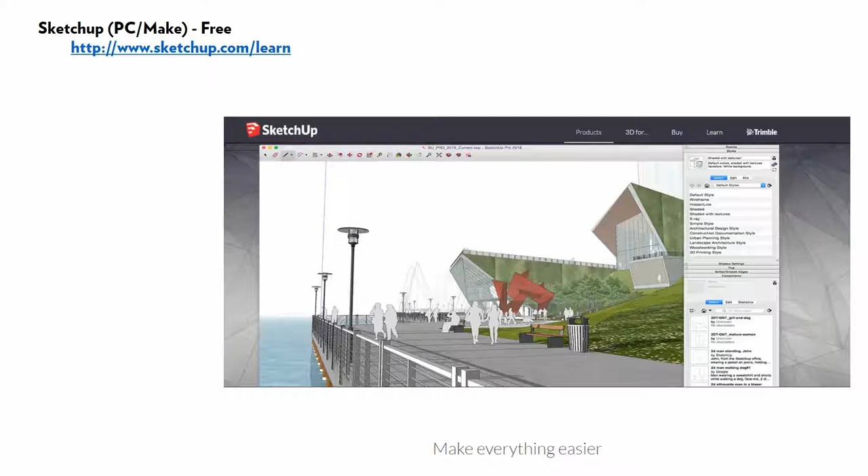SketchUp is a free program for large-scale stuff. You can do a whole host of 3D design, but it's really meant for architectural work. In fact, our entire workshop can be rendered in SketchUp—here's our building.

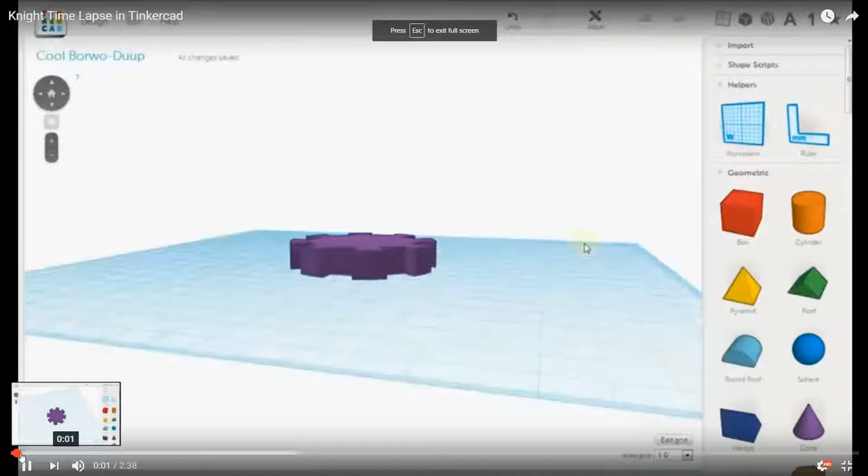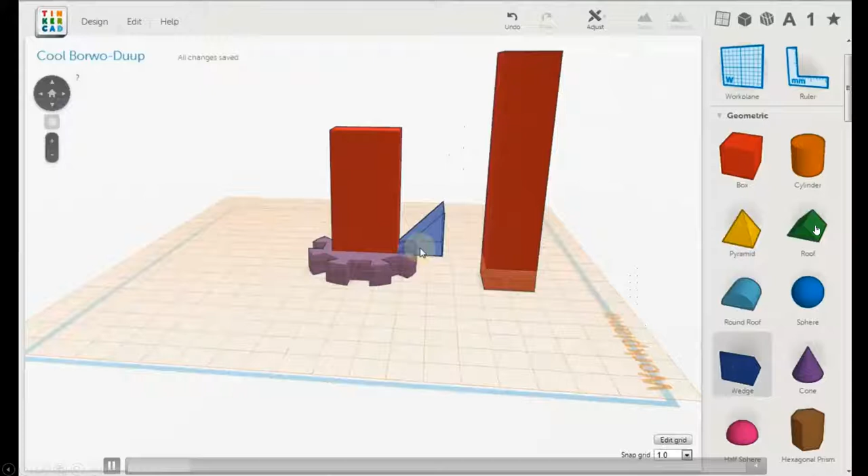Here we're going to step through an application of using Tinkercad, where I was very impressed with someone who took Tinkercad to create essentially a chess piece out of things that look like tools. So here you just add blocks. You don't even have to design these blocks. You just drag them over from the menu, whether it's a box or a cylinder or what they call a little roof, and you can create shapes out of these things, or you can use these to create shapes that you subtract out of these bigger pieces.

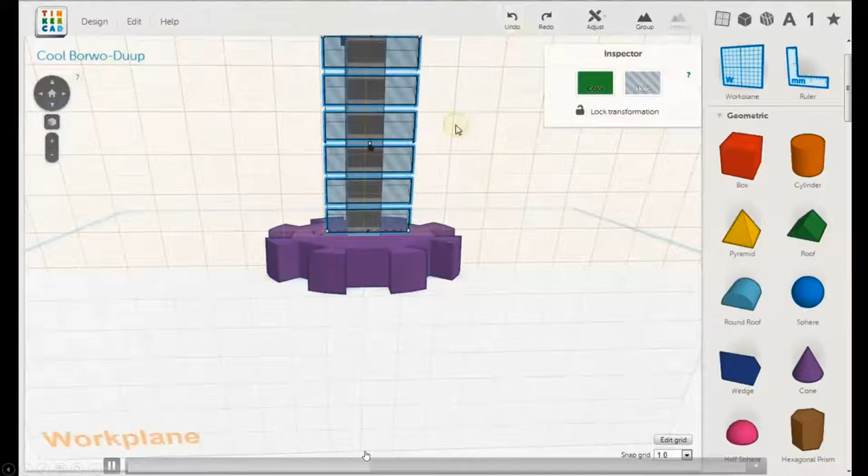So here we're seeing someone make a chess piece that looks like a handsaw, and shortly you'll see them copy that roof shape, duplicate it, group it together, and then subtract it from that metal-looking centerpiece there. I'm going to skip ahead so you can see that happening. So here they took a lot of those triangular prisms and grouped them together.

If you can group objects in Microsoft Word for making a figure, you can do CAD. It's really intuitive, really fun. And then, of course, you can save this file and you can 3D print it, or you can slice it for laser cutting and machining.

Another thing I really like about Tinkercad is Thingiverse. Thingiverse is a free repository of legally downloadable 3D design files. So you don't need to create things from whole cloth. You can download, for example, a phone case, and then Google, say, the word falcon.

I learned that if you Google for images, there's actually an option to choose what type of image, and you can select to just show line art or line drawing. Equally, you could just search falcon space vector or falcon space SVG, which is a popular vector type of extension. But this will limit the results to these line art images. And then pick the one you want. This fellow picked a superhero named Falcon.

Then use an image conversion software that's, again, legally free through the web, where he uploaded a JPEG and it gives you an output of a vector. Later in these videos we'll talk about what vectors are. You can import that vector into Tinkercad, and the nice thing about Tinkercad is it automatically can add some depth to an otherwise two-dimensional vector. So here it's automatically added 10 millimeters to the thickness of that vector art.

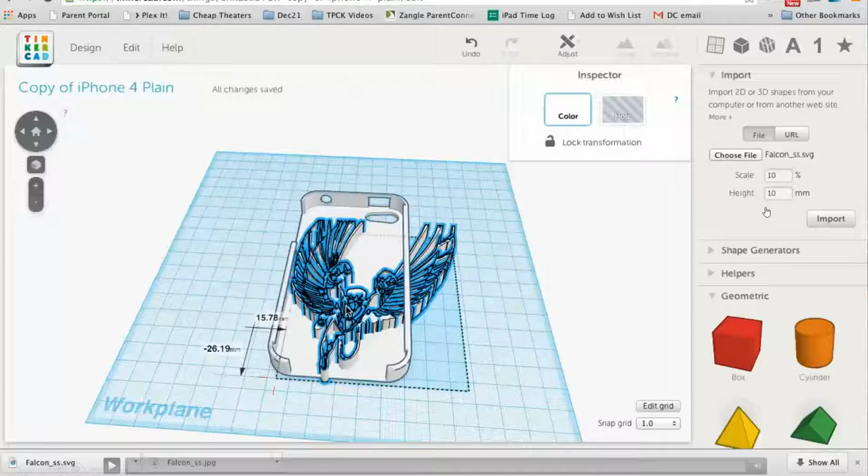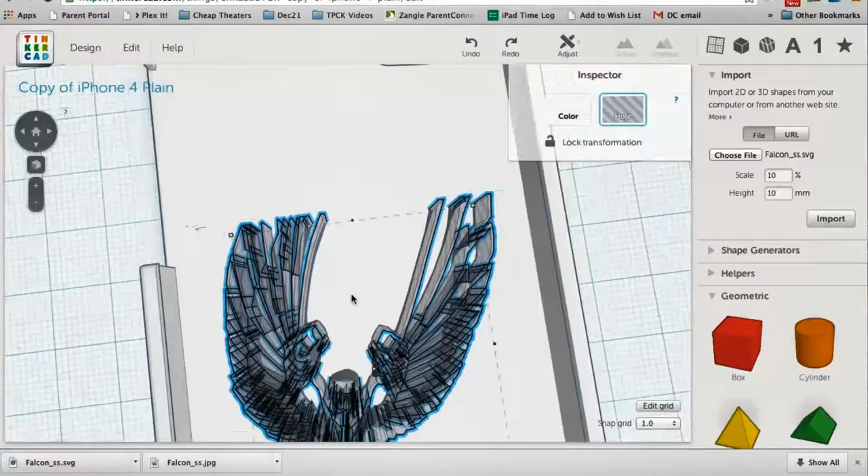This person took that image, scaled it down, and then used it to effectively emboss or subtract out of, or add to, that iPhone case. So you can see that very quickly you can download a legally free 3D model of a phone case. You didn't need to create that yourself. You can search for an interesting free image, turn that into a vector, turn that into a 3D object, and either subtract it from the thickness of the phone or add to it. Very rapidly you can customize and add value to digital prototypes. And then, of course, you can 3D print this or machine it or what have you.

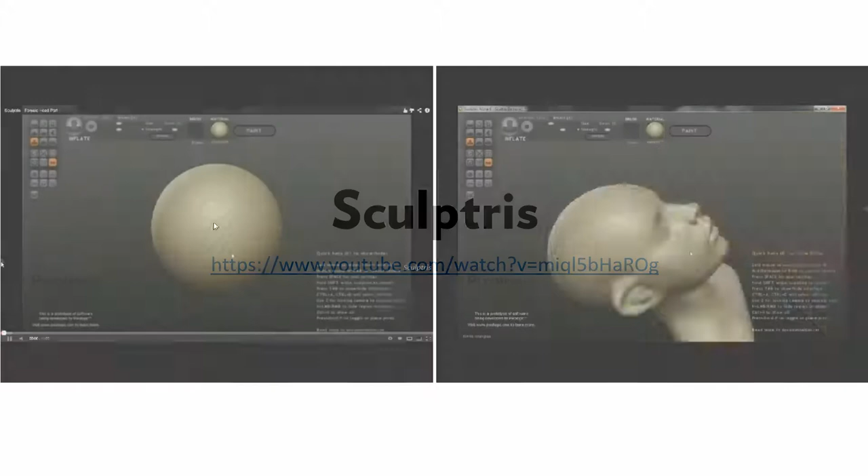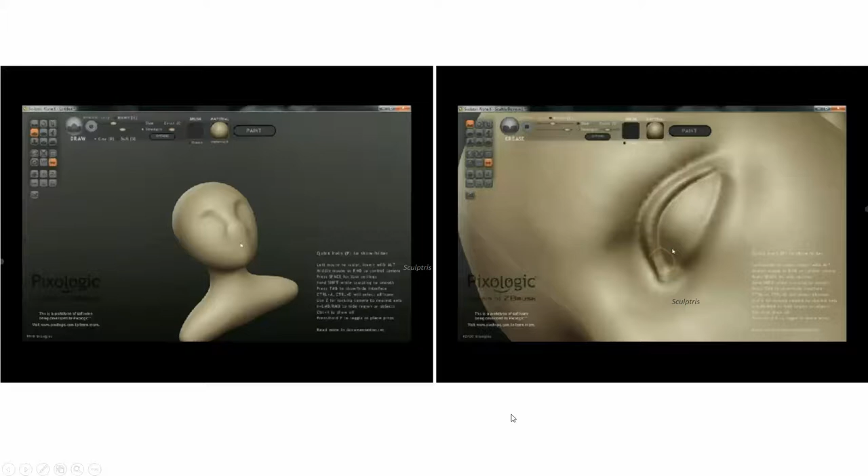Here we'll have an example of Sculptris. Sculptris is that 3D sculpting program. This is a bit time-lapsed, but essentially you see a ball of clay on the computer. Wherever you drag the mouse, it either removes material or adds material, stretches or compresses. So if you're a talented 10-year-old with a good eye and some patience, you can craft the digital file necessary to send to a 3D printer, laser cutter, or CNC machine. Very intuitive, very easy. It gets even better.

We have an Oculus Rift. We have a number of virtual reality and augmented reality devices at the Foundry. One of them is the Rift, and Rift has a software program called Medium, which allows you to use wireless handheld controllers—these are wired, but ours are wireless—to create amazing things out of thin air. This is a kind of creepy spider, but you can create all sorts of fun things very intuitively and then 3D print it.

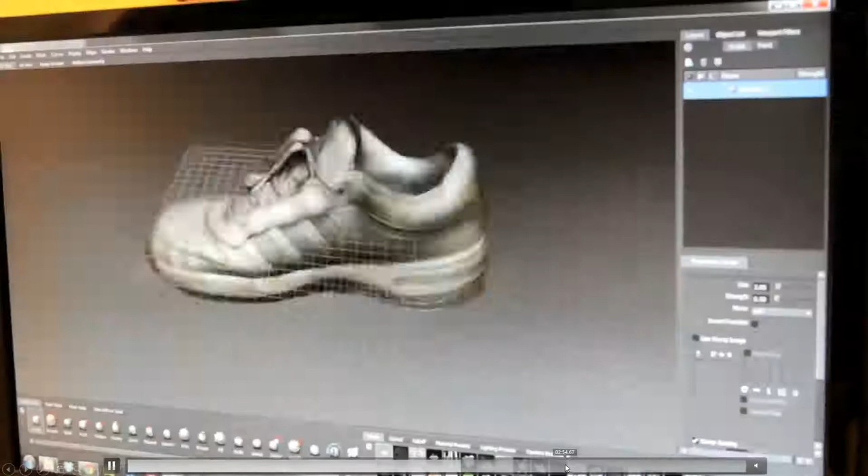It will take those photos and automatically stitch them together into a 3D shape. So again, if you can sculpt something by hand—clay, wax, or even Play-Doh—or if you can 3D scan something that already exists, a piece of sculpture, or even your head, you can make a 3D model that you can then send to a digital prototyping resource.

Really exciting. And if you want to add life and dynamism to these things, all sorts of free electronics and programming resources exist. Arduino is our favorite—it's a very cheap card. This one is a few years old.

You can buy this card now for about $4.73, or you can buy a kit with all sorts of extras—a remote control, LED displays—for very cheap. You can legally find many computer programs, called sketches, to run on these things. Again, you don't need to create things from whole cloth; you can use what's already available on the web to empower your ideas.

There's also a simulator for Arduino called circuits.io. This is another Autodesk product, so you can test your software program before running it on Arduino, possibly risking popping some capacitors or damaging another chip.

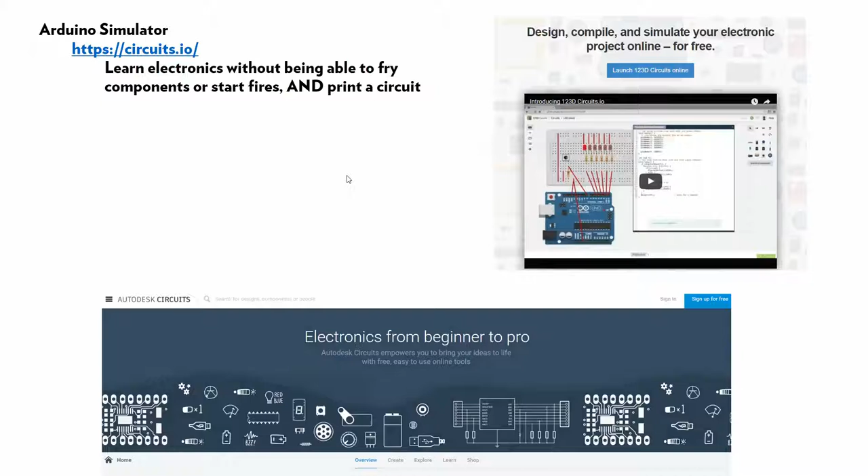Fritzing is another great Arduino simulator. Not only will it let you test your sketch or computer program, but if you like how your circuit diagram works, you can actually print it—or email it to a company that will mail you back a printed circuit board instead of just a proto board like this.

Really amazing stuff. And PageNodes is a web-based Internet of Things platform where you can create Internet of Things apps very conveniently. So check out PageNodes.

Scratch is a fun way to develop video games. It's an MIT product, great for kids or adults alike.

Lots of fun. And you don't need to come to the Idea Foundry to 3D print or machine something—there are services that will take your emailed file and mail you back a physical prototype. Shapeways is amazing; they'll send you back wax parts if you want to cast it yourself, or plastic, silver, bronze, gold, or even platinum parts if you want to pay for it. Shipping is just $5 and often takes just 2 weeks.

Make XYZ is another 3D printing on-demand service bureau. So is 3D Hubs, and so is Fictiv. I know the folks who run Fictiv—they'll mail you a 3D printed part in a day, or a CNC metal machined part in 3 days.

Really amazing. And 100,000 Garages is a collection of people who own ShopBot CNC router tables and other machines—a kind of distributed manufacturing network throughout the United States. So there's a whole host of free and cheap digital design tools, free and cheap electronics and programming tools, and cheap prototyping, 3D printing, and metal machining tools as well.